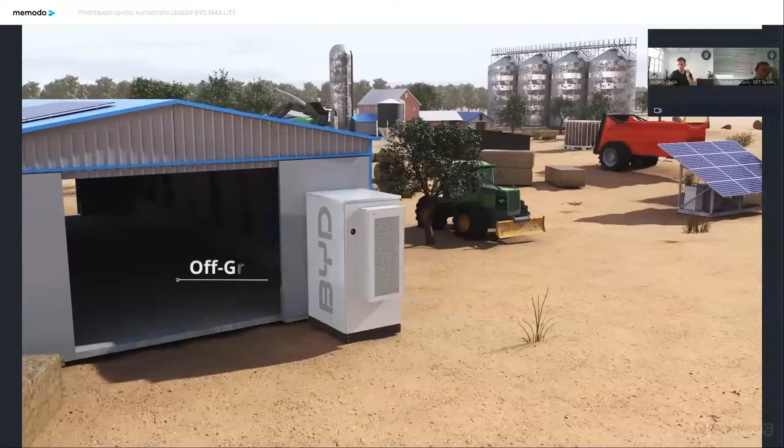Sorry. So what the video should show you is a quick overview of the commercial area of battery storage systems. We have the BYD MAX LITE, which is like the HV series from the residential area, a high voltage storage system with an external inverter.

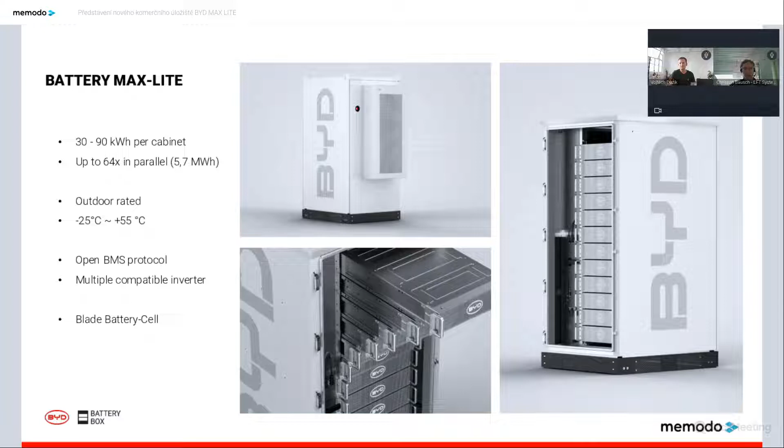So we come later to the data sheet, so we will answer some questions there. But yeah, maybe you can translate that.

What do you mean? No, we will come to the data sheet later because there are some questions. Yeah.

Okay, let's carry on with the business cases. I just muted my phone. Sorry for that. It was hammering all the time.

To the business cases, we have 3 major business cases for C&I storage systems. This is the self-consumption, the peak shaving, and the EV charging infrastructure.

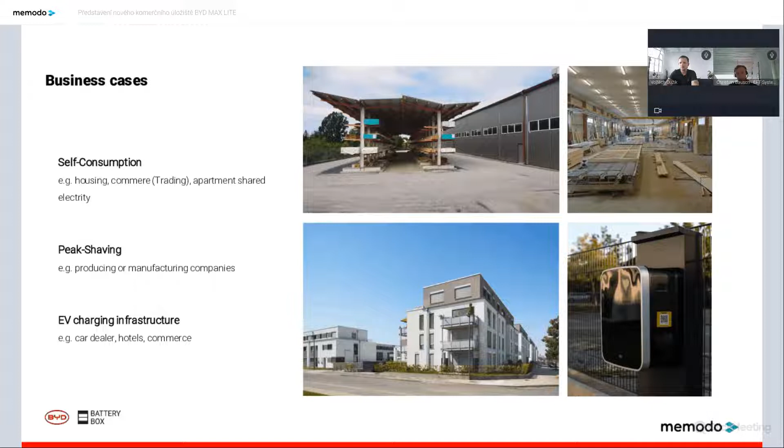So I would like to present the easiest business case and one of the most profitable business cases in the self-consumption area. Peak shaving and energy boost for the EV charging infrastructure are also highly profitable, but more complex to design. So I chose that one to present it now to you.

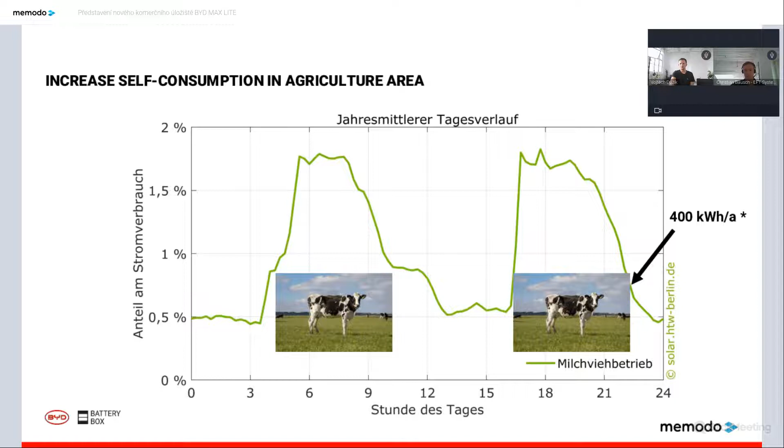And as you know, the PV curve is the highest at noon. So we have here the chance to take the energy from midday into the morning and the evening hours and increase the self-consumption rate.

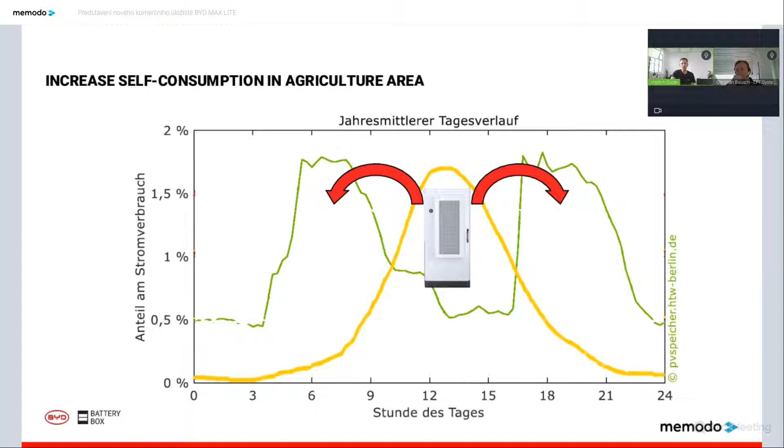And I took that from a research publication of a university in Berlin, and this is a rule of thumb for the design of the energy system, and it states you need 1 kilowatt-hour storage capacity per 1 megawatt-hour yearly consumption, and then your system is well designed.

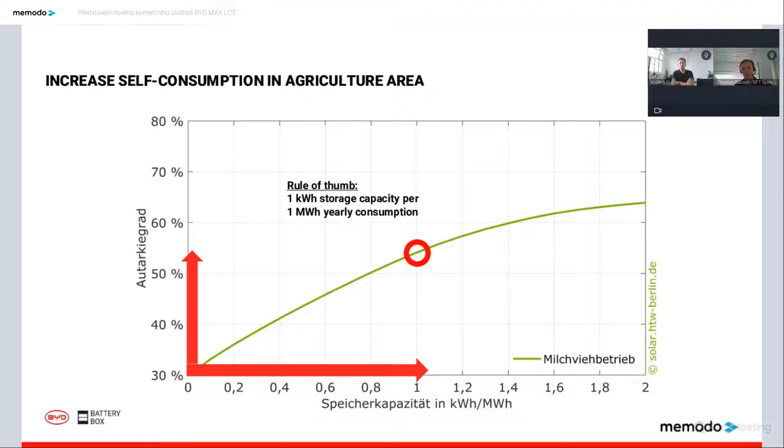And if we compare that to our 400 kilowatt hours per year for one little cow, then we have one Battery Max Lite is equal to 200 cows, and this is a pretty good business case.

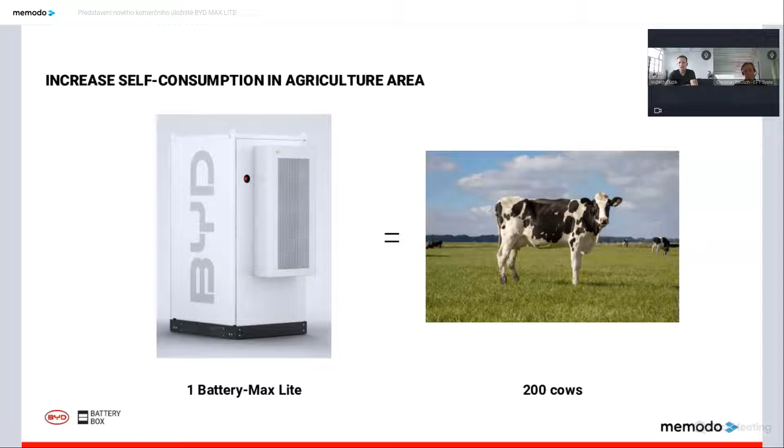Okay, so do we have some questions collected for now? They're all in chat, so I just saw the IP question. So the system, I can translate it maybe. Okay, the IP rating is IP55. And some other.

And this is IP. I tried quickly. It's a question about the battery: it doesn't have its own inverter, so it has to be added extra to the system.

Yeah. So like you've seen maybe in the video, can you mute yourself?

Okay. Like you've seen in the video, the inverter is coming externally. So you put the inverter either on the side of the Battery Max Lite cabinet, or you can place it somewhere else nearby if it's a standalone inverter.

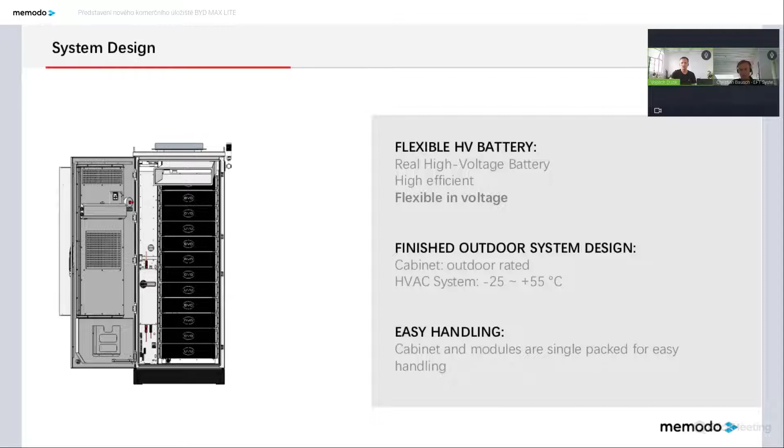So let's go in detail with the data sheet. There were already some questions about this. So I told you about the flexible voltage we have corresponding to the number of modules. So we are starting from 300 volts with 4 modules, and we're going up to even 900 volts with 12 modules.

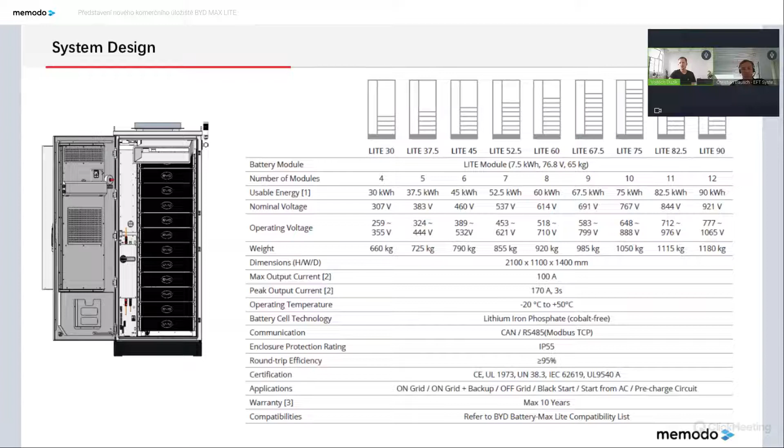Okay, so I would give some technical insights next. Maybe we do a little question session. Number of life cycles: I cannot tell you in detail yet because I don't have the warranty letter so far, but we state 10 years of warranty.

Technical conditions of charging cycles, discharging not below X. I think you mentioned here some capacity we need to leave in the battery itself. This is a little bit dependent on off-grid or on-grid conditions. So if you have an off-grid system, you need to run a really higher limit here. But in on-grid conditions, at the moment for the commercial series, it's like 5%. We can really lower it down to 3%, but the standard is 5%. So that in case of a blackout, the system is still covered for some time.

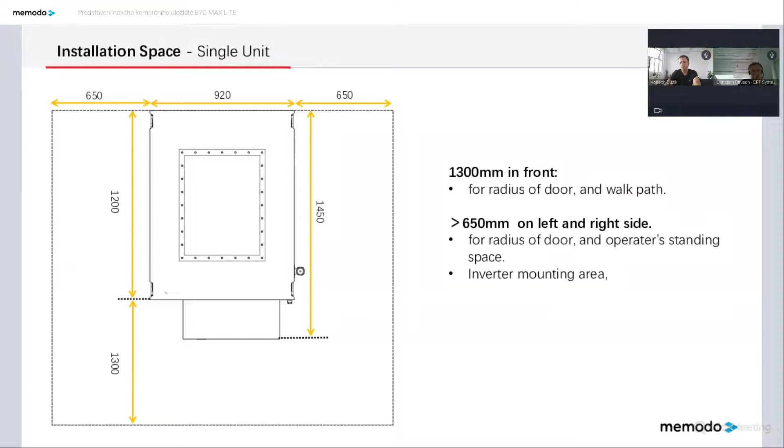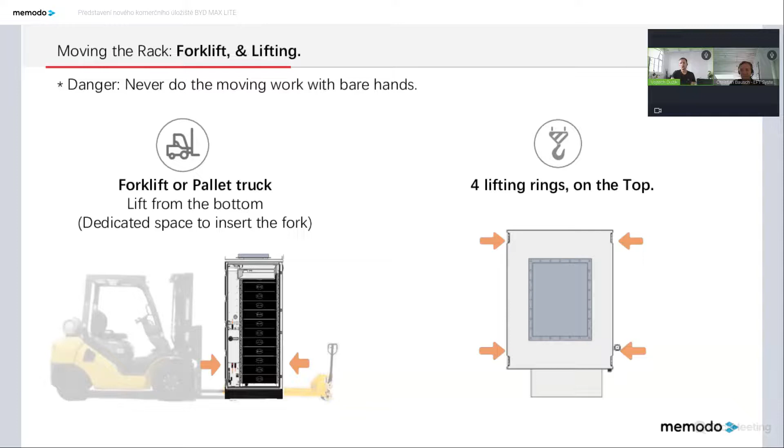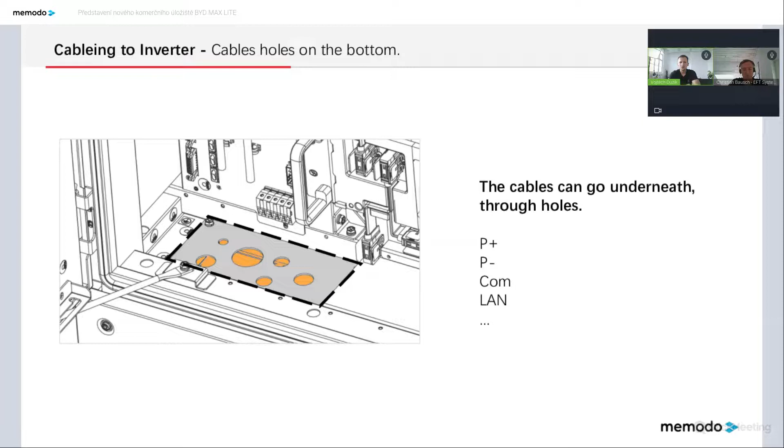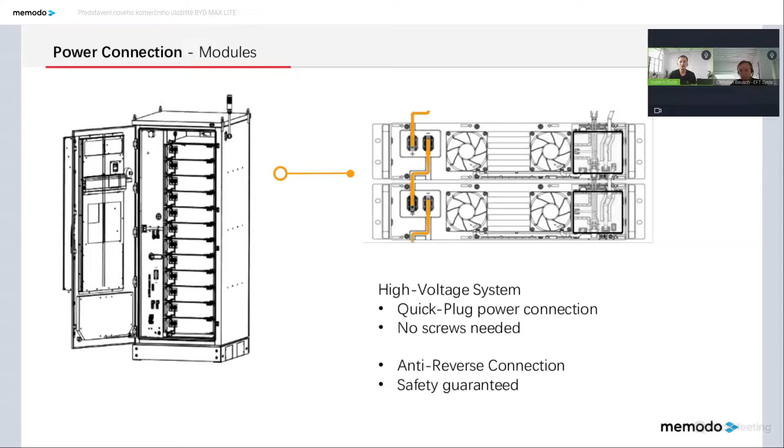Here we see it. We have no screws anymore, so it's easier to do it. Just click it in. You don't have the danger of a reverse connection or a short connection, a short circuit. So it's absolutely safe. You put the caps on it, and you're ready to go.

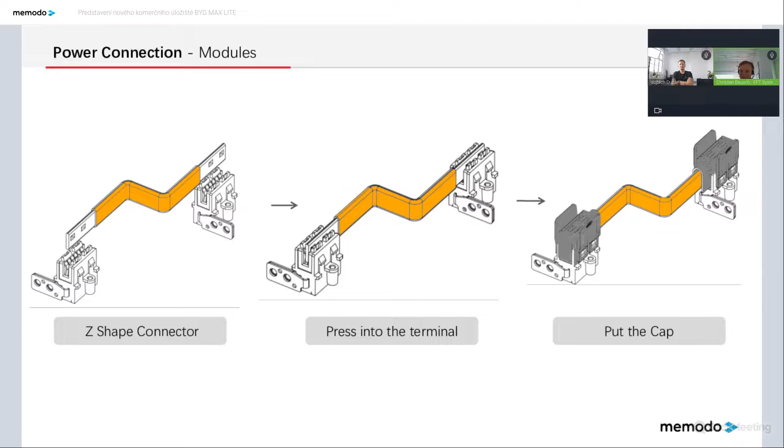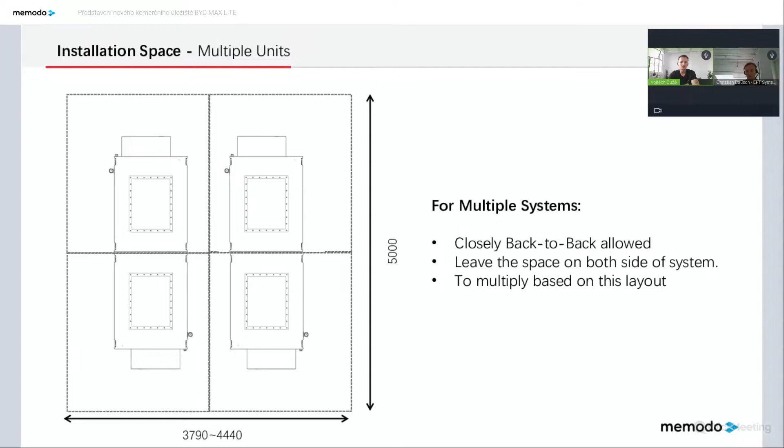Okay, so I'm at the end of my slides. I hope I gave you some insights into the Battery-Box Max Lite. It's coming in Q1 2023, so it's really not far to have it in reality in front of us.

And now we can have a talk on some questions.